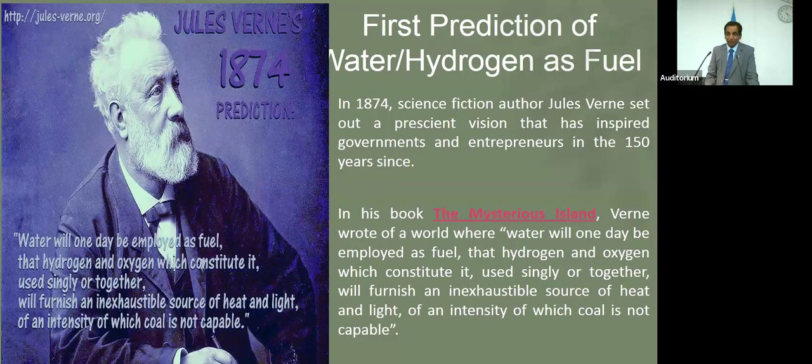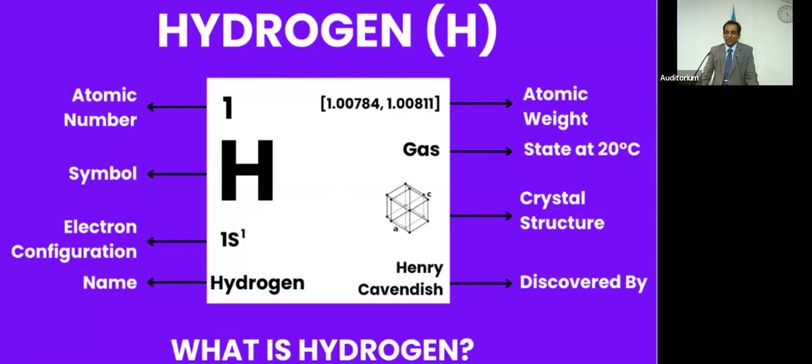So we will go into hydrogen. We all know hydrogen is the smallest atom and it's the starting element in our periodic table. It was discovered by Henry Cavendish, and the atomic mass, the crystal structure - everything is there. The main problem with hydrogen is the nature of the size of the atom. It's very difficult to contain - it's the smallest atom in the universe.

Being hydrogen, nobody will accept hydrogen as a fuel just like that - it needs to fulfill certain characteristics for the commercial world to accept it. So I have listed out some of the characteristics that are required for any energy source to be considered a suitable fuel. The first one is the energy content.

You can see there are many energy sources like geothermal, but the energy content you can harness is quite low because there's no exergy difference there. Then there's availability - take geothermal again, it is available only in a few places. But if a source is available around the globe, then it can be considered.

The third one is engineering sophistication. For example, take nuclear energy - how difficult it is to generate nuclear energy. So people would like to see the simplest technology for the conversion of energy from the fuel source.

And fourth is cost of production - it is the most vital factor, even though I listed it as number 4. Everybody will look at the cost, and the stage of development of energy conversion devices. You can have an energy source, but if you don't have conversion devices to utilize it, you can't do anything with it.

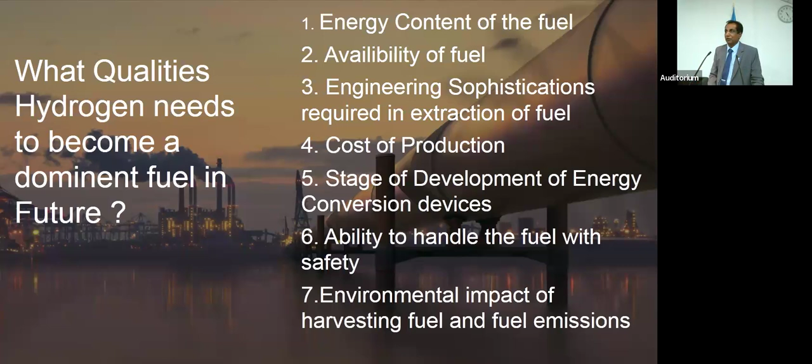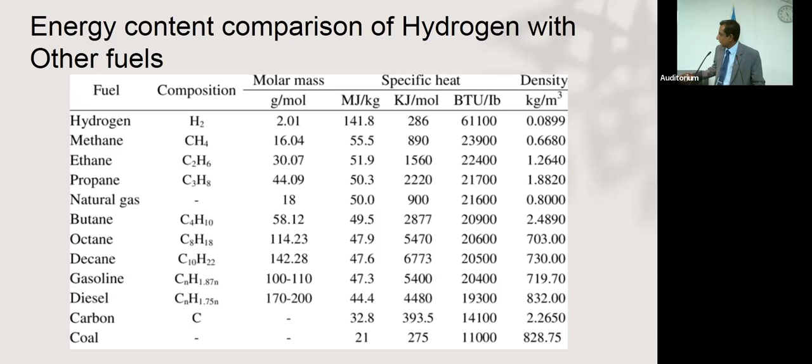So I will go through these one by one to show why hydrogen qualifies. You can see the hydrogen energy content is 141 megajoules per kilogram. We all know gasoline and diesel are about 47 - this is almost 3 times that of diesel or petrol. So it qualifies - it has almost 3 times the energy content of the fuels we use today. Hydrogen qualifies on that matter.

Then, availability of hydrogen - I will show you a little clip on that.

Sound is not coming.

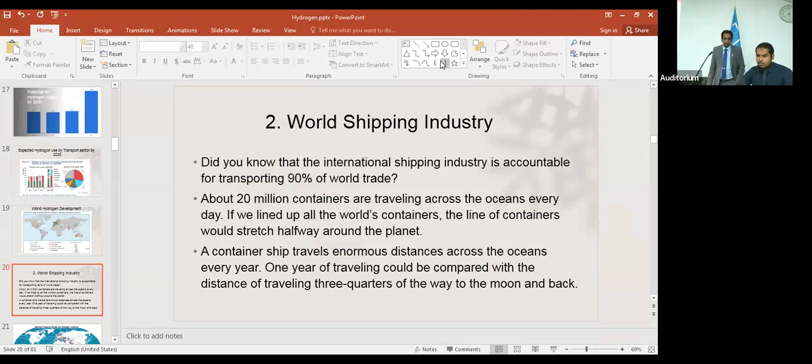So they can't see the slides. You can share again, it's not showing here. No, I'll call someone.

Right now, 90% of the world trade happens through shipping. Per day, 20 million containers travel across the ocean. If you line them up, it's half the size of the earth. Containers stretch halfway around the world. A container ship travels enormous distances across the ocean every year.

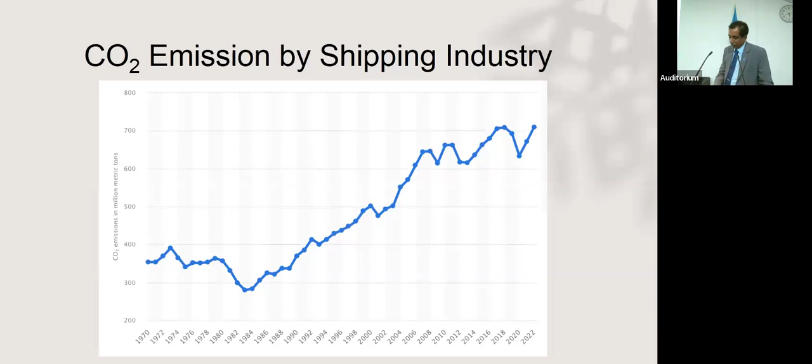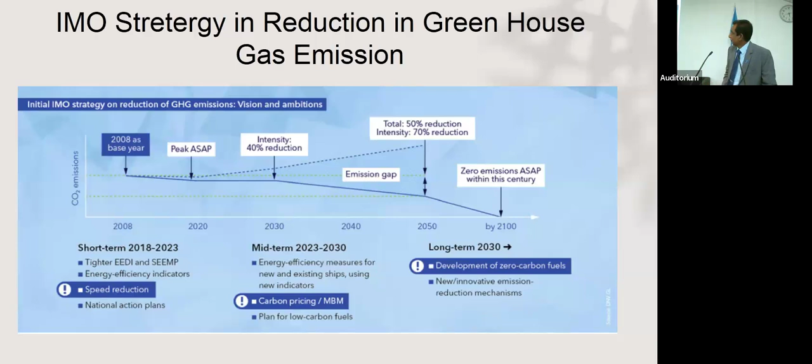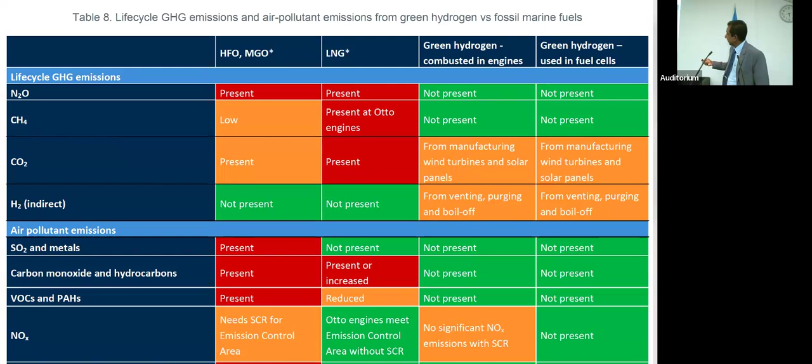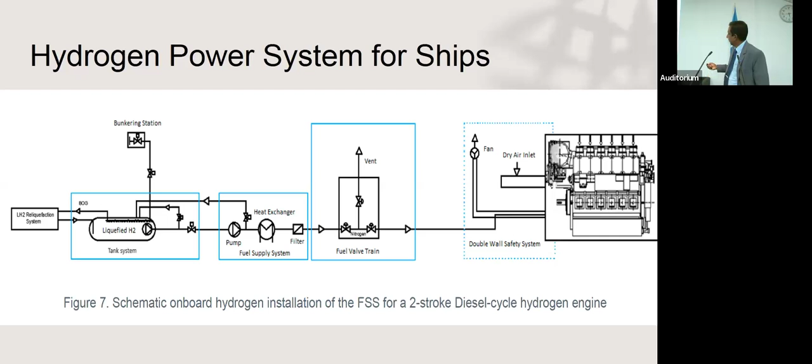But generally it would be very clean fuel. If we take the powertrain of a ship with hydrogen, you can see there's a liquid hydrogen storage tank and the fuel pump. This is a gasification process where the liquid hydrogen would gasify and then feed into the engine and go into power generation or the drive.

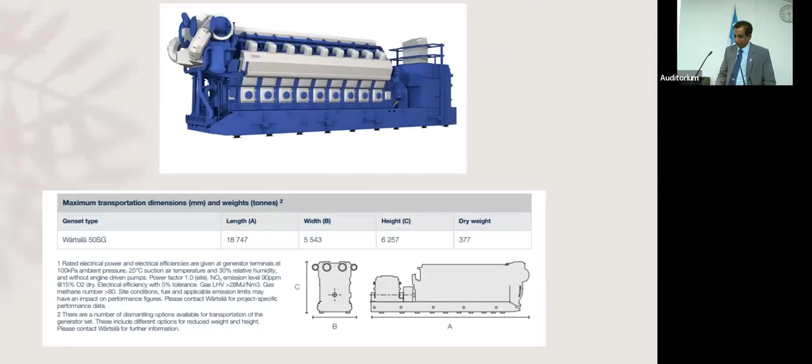This is Wärtsilä, one of the major shipping industry players, they built their hydrogen engine. You can see everything is already being finalized. This is the ship development for coming years.

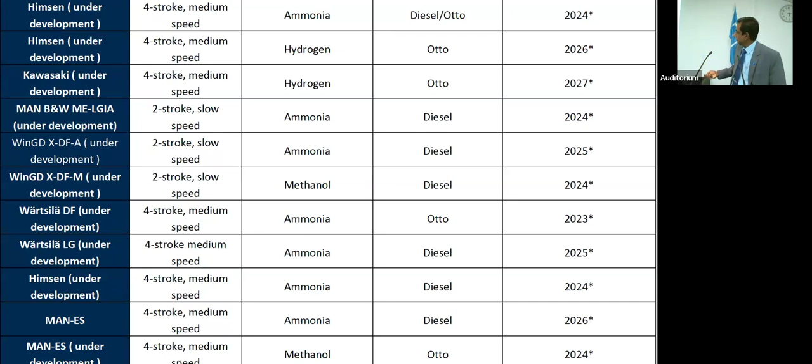First one, Himsen, 2024, it is from ammonia. Then 2026, 2027, there are two hydrogen models coming, Kawasaki and Himsen. So it will be coming onto the ships, you can see how it's being developed. Ammonia, hydrogen, methanol, so they are using all the fuels. These are the cycles of operation, the plan for the upcoming mechanical driven systems in the shipping industry.

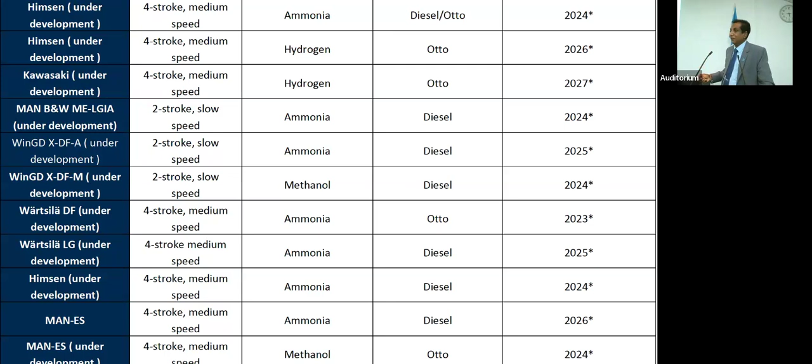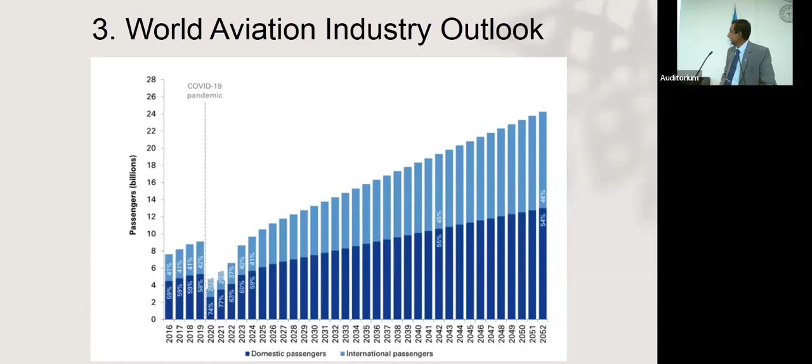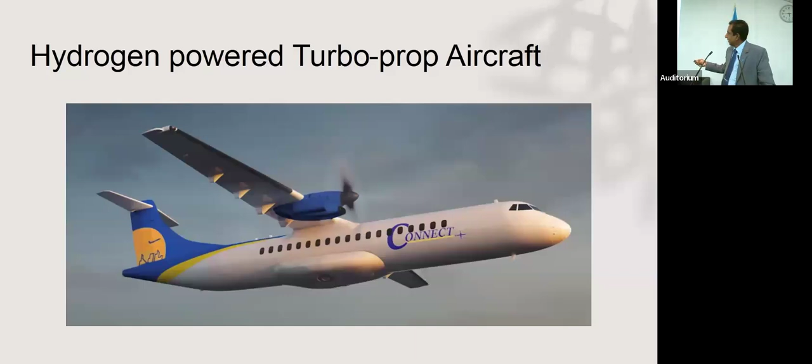Fortunately, right now they have started hydrogen powered turboprop engine testing, and Airbus has started their gas turbine testing. This is actually how it's fixed, so it is not sacrificing any safety. It's running with the main engine, this is being tested while the other engines are running.

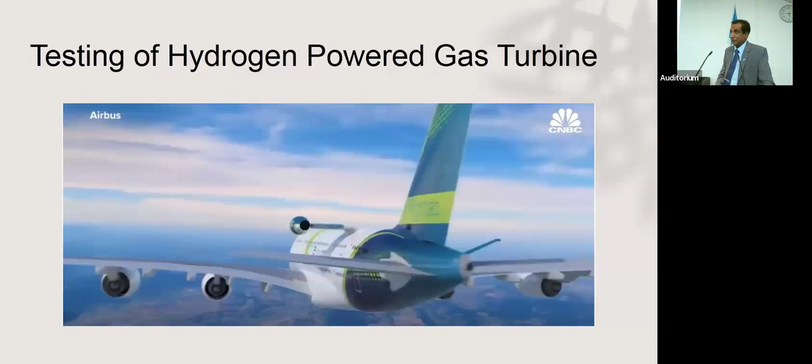As the hydrogen infrastructure is not built, they are developing pods, hydrogen pods, where you can just plug in. So you don't have to build your infrastructure, piping network or anything. It's like your luggage, it will fit onto the cargo chamber of the aircraft. You can just plug in this gas and run it.

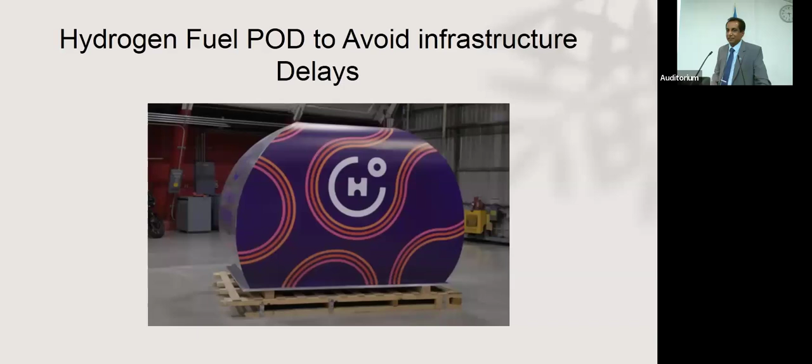As a country, we have to look on to something like that because we don't have the capital expenditure to put all the pipeline, but we can have our hydrogen system and make hydrogen pods of this nature, right? Where we can fit and give it to the ships. This is like a containerized thing, like our trade pods, where we can fill it and send it.

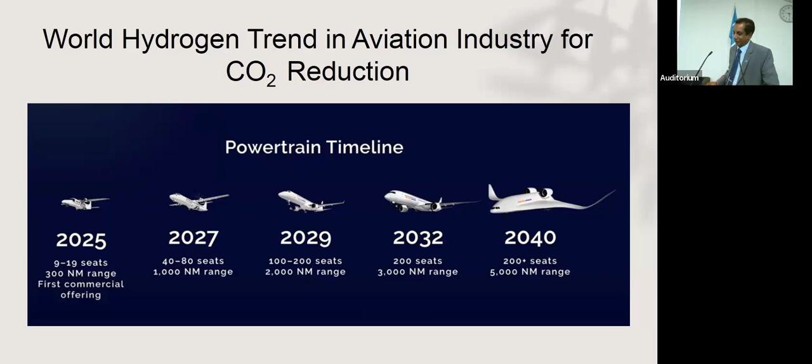So these are the aircraft development plans for the future in the world. We have to see how our fuel supply trend is matching with this one. Our Colombo port, our airport is not of that nature, because generally air travel will depend on business clients, and we don't have much industry where business travelers are coming. It's only tourists coming, but as per Sri Lankan Airlines, we serve this much of routes, so there are a number of aircrafts coming. So there will be some requirement of hydrogen.

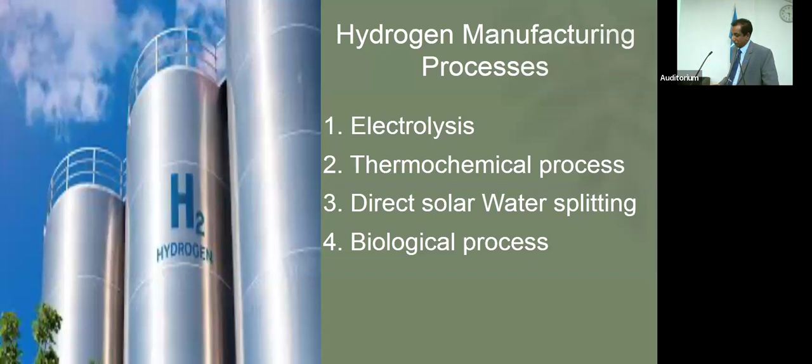So we had discussed the requirement of hydrogen in aviation and naval industry, so we have to see how we can make it. In the world, there are 4 main processes: one is electrolysis, then the thermochemical process, and the third one is direct solar water splitting and biological processes. So those are the main processes where we can use hydrogen manufacturing.

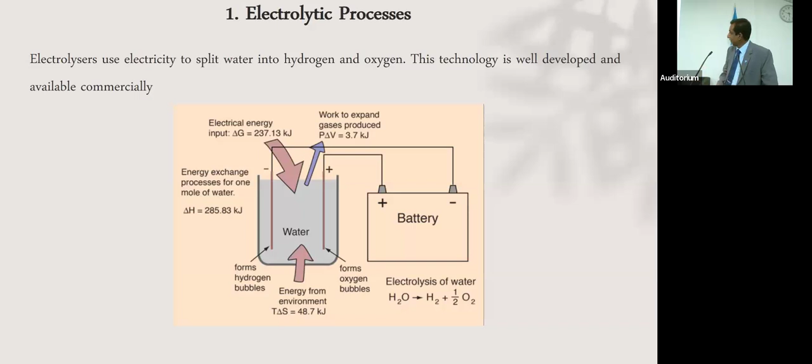So for electrolyzers, I initially showed you the simple thing, but you can see with the energy balance how it's coming. This is how it happens, but actually right now it is happening on this scale. It's called PEM, a polymer electrolyte membrane electrolysis. So this is the membrane.

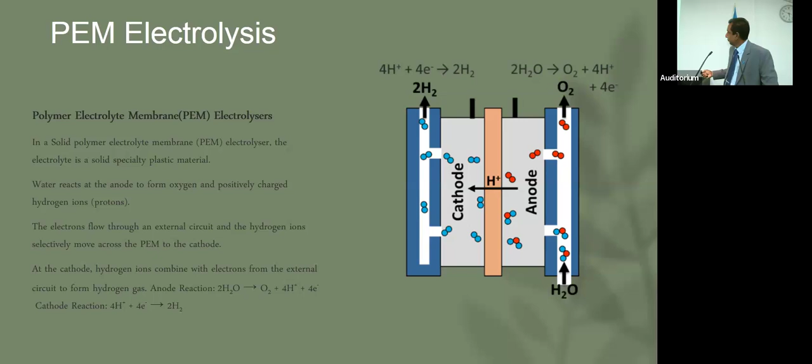So when we are making hydrogen, we were putting salt, right? You can't put salt when it comes to commercial operation, it will deposit on the electrodes. So that's why they are using this membrane. It's a polymer membrane that allows the proton to be moved, and I will show you a little video on that.

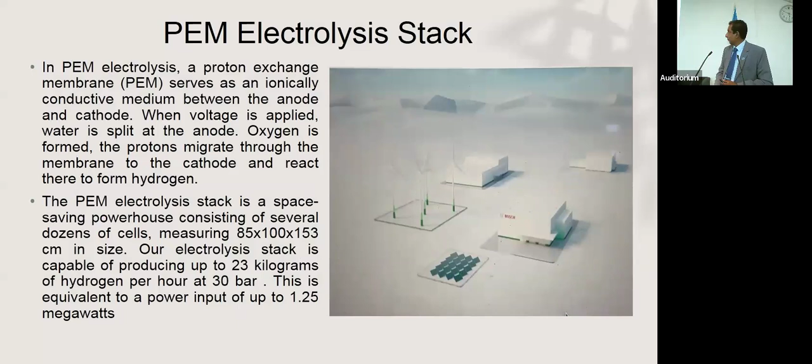You might be able to see, this is the Bosch PEM electrolysis system, but this is a commercial scale. I will show a more detailed one later. So this is called the hydrogen stack. They don't call it hydrogen, they call it the electrolysis unit, the stack. So I will go into more detail on this one.

You can see on this one how the system works. The containerized configuration reduces construction and installation costs because much of the process equipment is pre-integrated before arriving on site. PEM electrolyzers are a mature and proven technology, using only potable water and electricity as process inputs. NEL's PEM electrolyzer system design operates at full differential pressure, hydrogen over oxygen, essentially eliminating the hazard of oxygen entering the hydrogen stream. Water, purified by a reverse osmosis deionization unit, enters the cell stack and divides within the inlet manifold to feed each electrolysis cell. As DC current is applied to the bus connections, a small fraction of the water flowing through each cell is drawn to the cell anode and split into oxygen ions and protons. Oxygen gas bubbles then form at the anode and are forced into the bulk flow stream. The water and oxygen management system circulates water through the cell stack to be consumed via electrolysis, removes heat from the cell stack to maintain the proper temperature, and removes the oxygen gas generated in each of the cells. Simultaneously, hydrogen is transported from the cathode side of the cell to the hydrogen management system. There, the hydrogen phase separator separates the liquid protonic water from the hydrogen gas. The hydrogen gas leaves the separator and is cooled to condense water vapor from the hydrogen gas stream. The separated water is then transported to the water management system and is reclaimed into the water circulation loop.

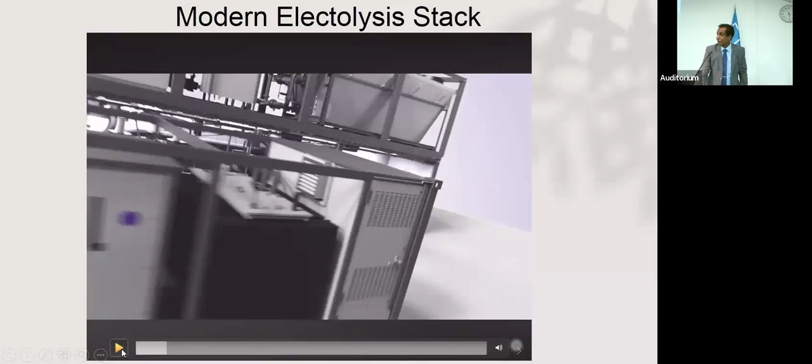In steam reformer technology, you react the CH4 methane with H2O steam. These H2 will contact with this, so 3 hydrogen molecules are created and carbon monoxide. Carbon monoxide is a very unstable element, so it always tries to become carbon dioxide, which is its natural form. So when the water is present, it will grab the oxygen and become carbon dioxide, and make another hydrogen.

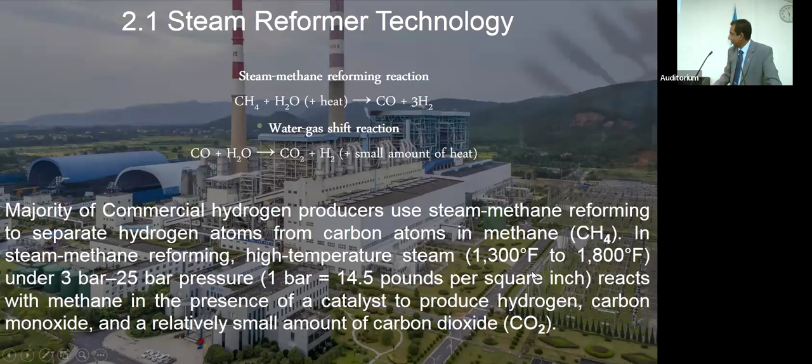So steam reformer technology is the technology that generates the highest density of hydrogen in any process. When you take electrolysis, you get 1 hydrogen and half oxygen, but here you get 4 hydrogen, carbon dioxide - that is the advantage of this one, you can get very high density of hydrogen. There you have to see the temperatures - the temperature of 1300 Fahrenheit, so they are operating at very high temperatures to achieve that.

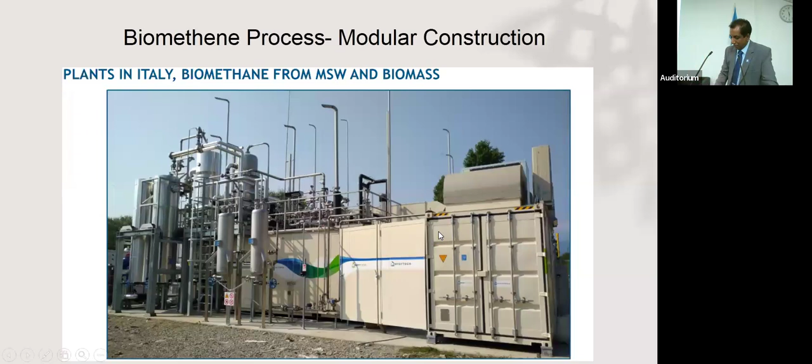I want Sri Lanka to try this kind of thing. We don't want a very big plant - we have to have maybe modular technology. Try this one, we will see with our garbage, our municipal solid waste. This is basically from MSW, municipal solid waste. So we can collect our municipal solid waste and process it, generate methane, and then that methane can be fed into this and generate our requirement of hydrogen. So as a country, we should start with a small step.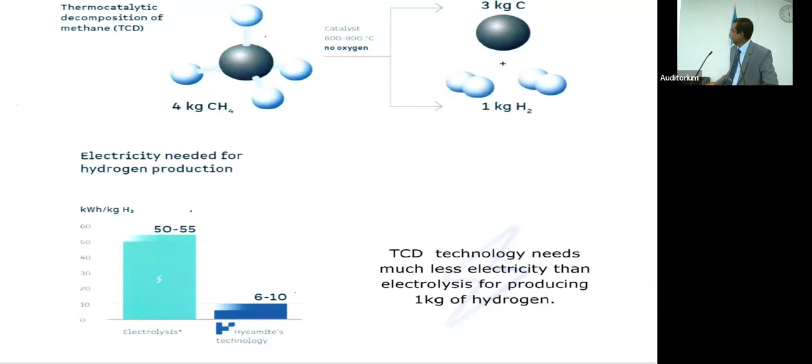And also the carbon dioxide emission - you can see for 1 kg of hydrogen, you have 3 kg of carbon. When you have the catalytic process, you can reduce this steam reformer's 9 kg again, you can reduce it.

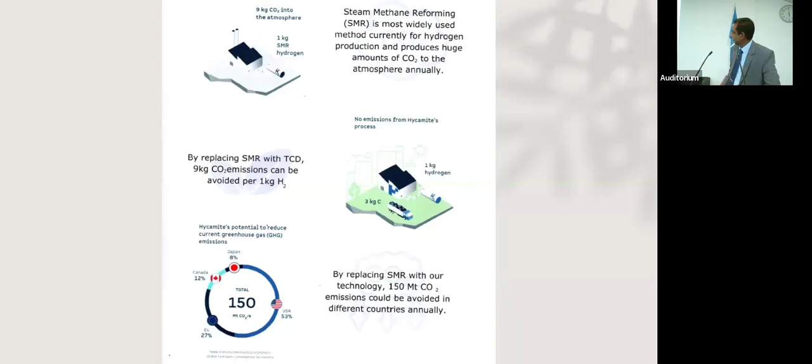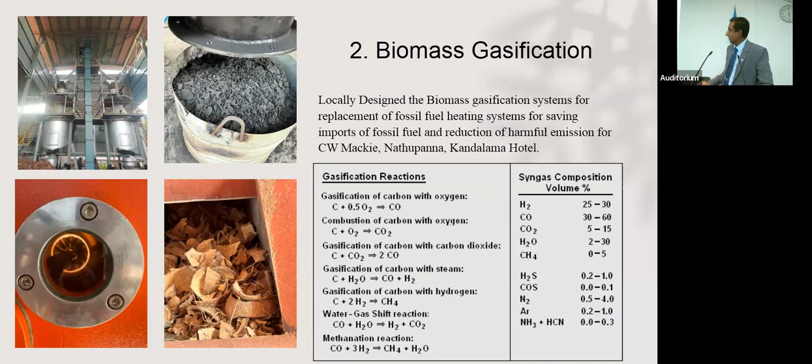So you don't have to go for very high technology. This is actually my design operating in Sri Lanka - this is a hydrogen plant. The biggest advantage is that you have a carbon sink there - 40% carbon is stored there. So I will show it to you.

This is the first experimental unit I had done with a few of our engineers. You could check the color of the flame here - you will see it coming white. This white area is the hydrogen part. You can see this is a local design process where the biomass is converted, and with hydrogen you can see this white color. I'm sorry about the noise, it was recording sound.

So you can see it's a continuous gas coming out, right?

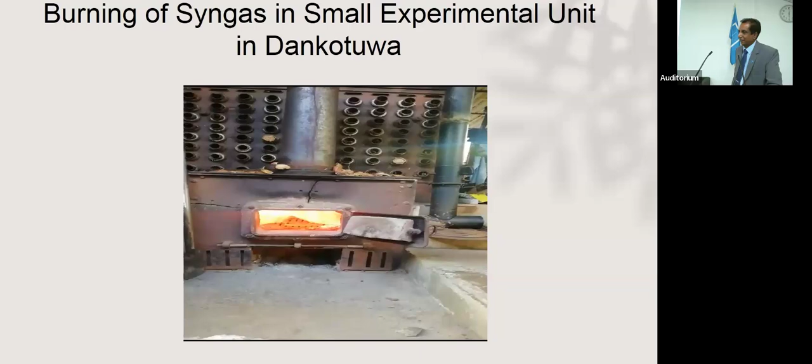When you have the correct oxygen level, this flame cannot be seen. This is without much oxygen mixing - this is actual level. You can see the smoke coming, but you don't see the flame there. That's the biggest danger with hydrogen, where you have an invisible flame - you never know until you catch fire. When your clothes or anything burns, you can see because it becomes yellow, but hydrogen, when it's burning, is an invisible flame.

This is today morning's operation - you can see it's very less color. So that system is generating hydrogen and carbon monoxide, it's burning there. Anyway, Parakrama had done this about 40 years before me, but I'm telling you, this is another technology we can do in our country to generate hydrogen.

Generally these kinds of plants have been there from commercial scale, I think from 2000. Kandalama Hotel is having one gasifier, CW Mackie Horan is having one gasifier, Tea Factory Hotel - in all of this I had involvement and we are doing it. Right now I'm trying to see whether I could give the technology for some industries to convert from fossil fuel to this type of our own fuel sources.

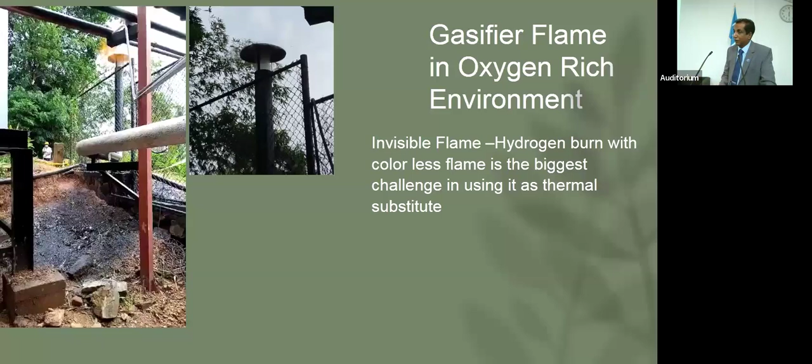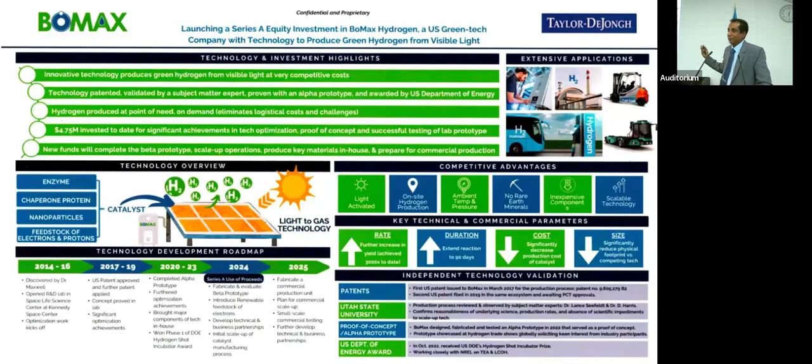So you can see how many techniques are available to generate hydrogen. We were looking at only electrolysis. I hope I brought you something you have not seen, where we can go into different areas of generating hydrogen.

Potential sources for Sri Lanka, I would say steam reformer using municipal solid waste we can do, and even electrolysis - not to a very big scale, but we can start on that, then gasification. Those three techniques we can see. I am not talking about the enzyme type because it is still in the experimental phase, but it will be commercialized pretty soon.

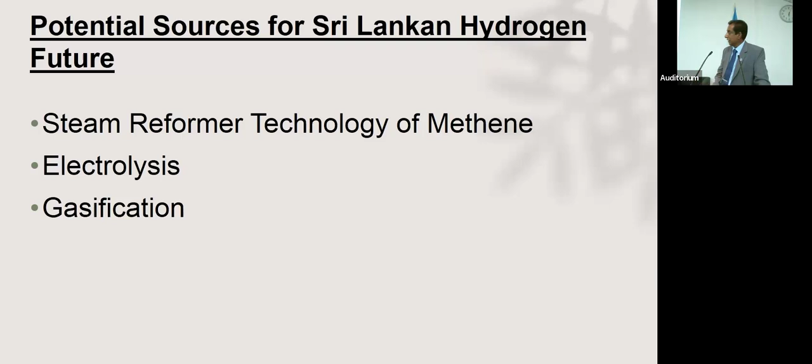So with the other sources, we would be able to increase it to 10 metric tons, right? Because this is Western province only. If we take all the provinces, we can go into 10 metric tons, right? So we can start those things. So I will show you, right?

This is the municipal solid waste, and this is how much methane is generated. Right now Sri Lanka is producing about 7,000 metric tons of municipal solid waste every day. Out of that, 50% is biodegradable. So 7,000 means 3,500 — we have this much. You can see how much methane we can generate, right?

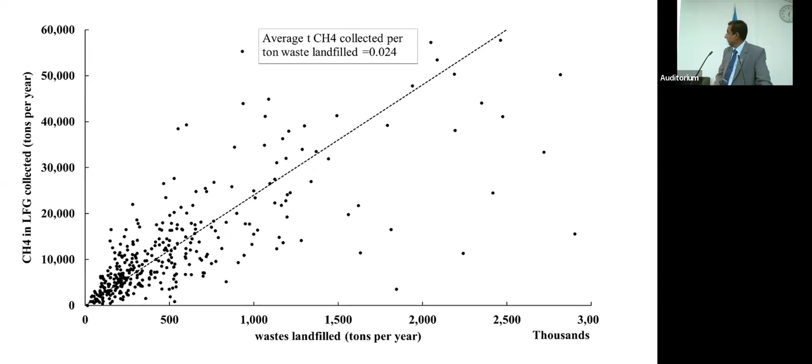So if we use our biodegradable municipal solid waste, we can generate more and more hydrogen into the system. You can see how much kilograms of methane can be generated. This is for anybody who would like to research into this area. All the information I've given, and I'm more than happy to support anybody who wants more information. So the conversion process of methane to hydrogen — you can see how much water is required, the energy, and the natural gas, so you could get 1 kg of hydrogen from that.

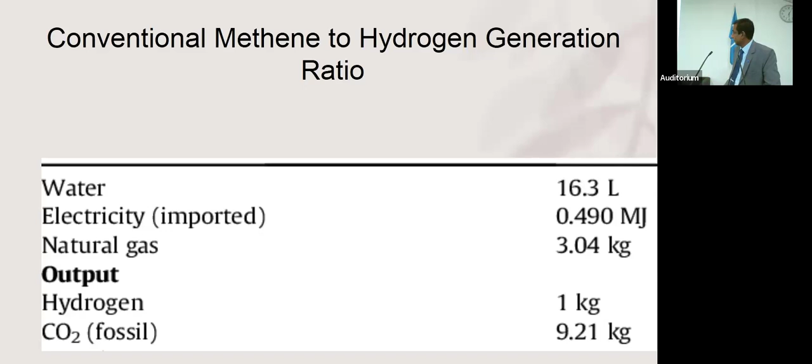And future hydrogen storage terminals would look like this. You can see, in airports, right? In ports also, when we have our hydrogen, we should have hydrogen storage hubs like this, right?

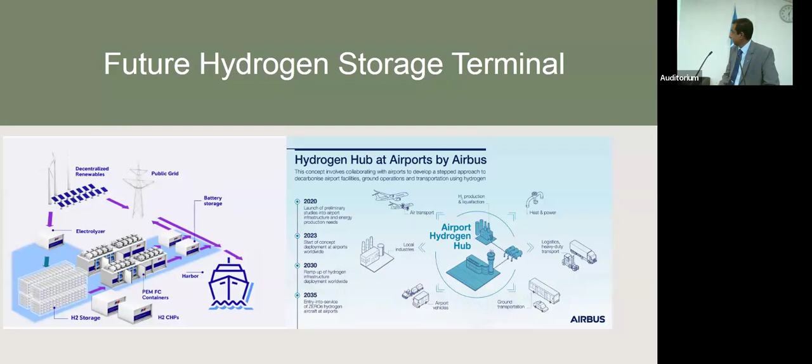So we talked about the good story, the best side of hydrogen. But there are many challenges as engineers we have to take on with hydrogen. So I would like to touch on those areas also.

First thing is for electrolysis, the water quality requirement — you have to see, right? This is lab scale water. You can see the chlorine level, the sodium, the silica, right? You can see how much purity of water we require in this electrolysis. Because if not, they will deposit on the electrodes, right? So this is the most challenging part. It's very easy to talk about the fairy tale of generating hydrogen, but generating this water is more difficult than making hydrogen, right? So you have to focus on that part.

That's why I wanted to highlight this one. So it is not easy — you can't just take an RO system, reverse osmosis system, and generate water, right? There is polishing and many other things to be done. You can see the requirement. So it is the most challenging thing we have to do with electrolyzers. We have to remove iron, particles, organics, bacteria, because everything will deposit and your performance will go down in no time.

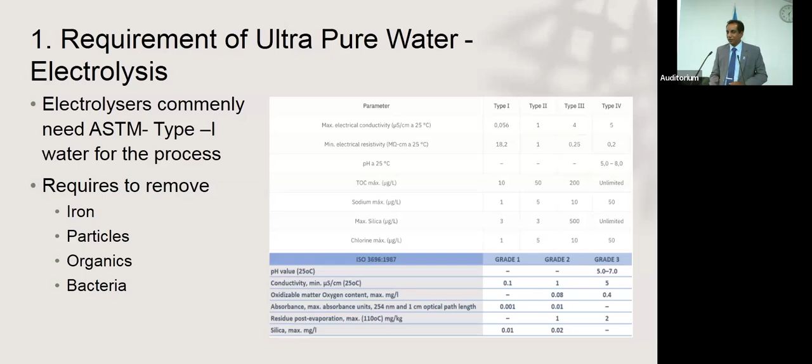Second thing is hydrogen storage temperature. Hydrogen has to be stored at minus 253 degrees — hydrogen will be liquefied at this temperature. This is almost absolute zero. 273 is absolute zero, so we are almost close to absolute zero. Keeping hydrogen at this temperature without heat being dissipated out would again be a challenge. This is called cryogenic, right?

The word cryogenic actually came from history — imagine the pharaohs in Egypt. If they were sick, they wanted to keep the person frozen until a medicine was found. That's why the word cryogenic came — that temperature was used to hibernate people. So these are the cryogenic temperatures we have to use, and keeping that temperature in the system would be very difficult.

Hydrogen evaporates at minus 252. So if the temperature increases, liquid hydrogen will become gaseous and create more pressure in the system — that is a very, very difficult task. Helium is the most challenging, but hydrogen would be third on the list. That is a very, very difficult thing.

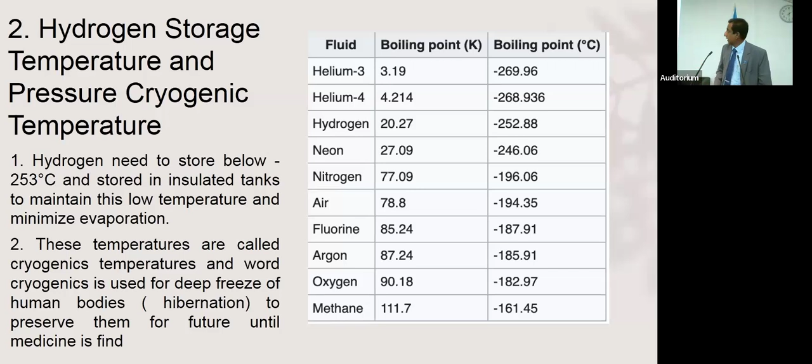And another one is hydrogen leakage. This is called the Hindenburg disaster, May 6, 1937. Hydrogen had been used before for air travel, for air balloons. There was a small leak, and in no time it burned — all the crew, 61 crew and 36 passengers, died on the spot. They were burned in the sky. This is the danger we are talking about — hydrogen leakage would be very, very lethal and a very difficult thing.

But as I told you, storage has been built with carbon fiber where even a sniper bullet cannot penetrate.

So there are many things that come, but still as a Sri Lankan, if we are building, we have a lot of challenges to do, right? So that's a very, very difficult part.

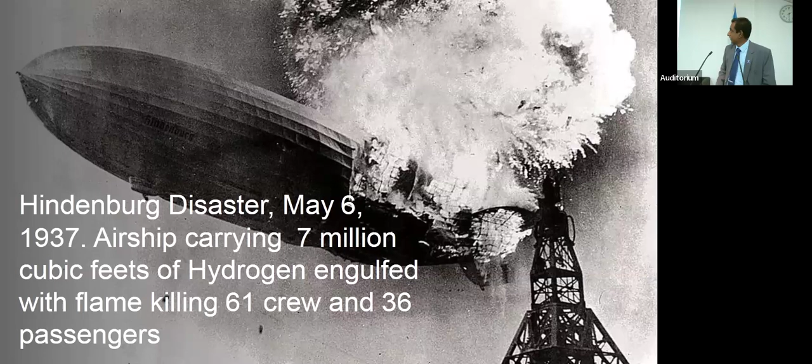Then the compressors. Actually, these compressors are already developed because LNG, liquid natural gas compressors are available in the world. For hydrogen, it needs to be stored at a pressure of 350 to 700 bars. So you can imagine, we never talk about 120, 160 for boilers, right? Here we're talking about a 700 bar pressure system. It is unbelievable pressures we have to work with, on liquid phase. Reciprocating and centrifugal, we can reach those areas, so easily the technology is available.

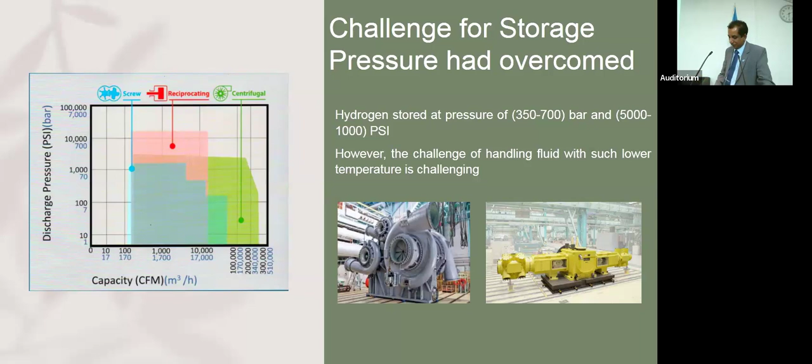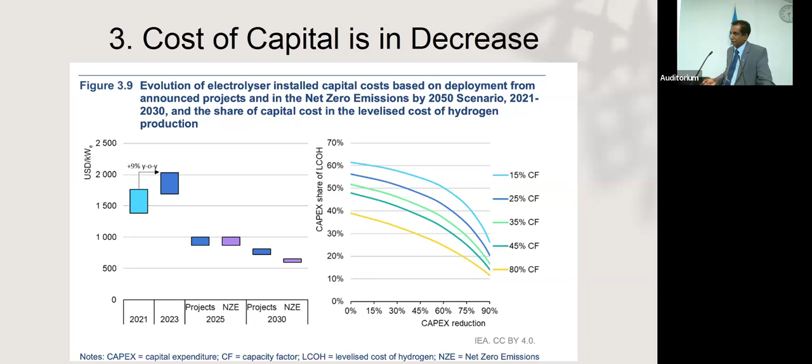But I will tell you there are challenges with it. The capital cost right now for 1 kilowatt is in the range of 1,500, but we expect it to come down to 500. So these are the trends. Until the trend comes to that point, it would be unaffordable for countries like us. But we have to see that part separately.

And the other one is storage space, because for a ship or aircraft, the space is very precious for them, for passengers and cargo. You can see marine grade oil, if it requires 1, hydrogen requires more than 4.5 volume. So if it's 1,000 meter cube, they require 4,500 meter cube space. That is a challenging part, especially on ships. This is very, very difficult.

That's why I told you why we require hydrogen infrastructure. No ship will carry fuel from one port to the end port. They will require refueling at a mid port, because they can't carry all the fuel since it requires a lot of space on the ship. If they keep that much fuel, they can't carry the goods. So they'd be sitting on a very dangerous bomb. They will always go for minimum volume, which makes their cargoes economical. So that's why we require this, and this is again a challenge.

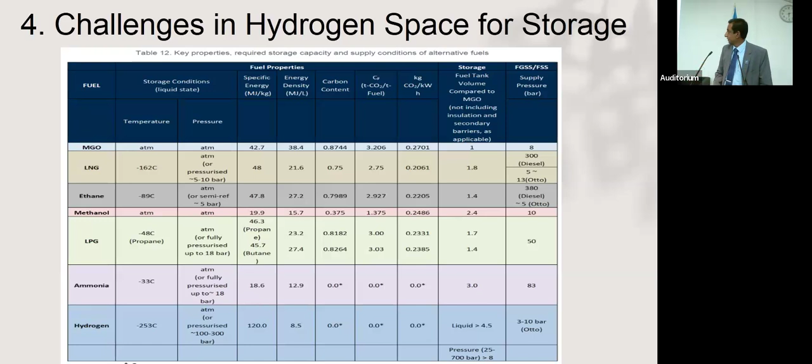Even at 700 bar at minus 253, we have this issue. So you can see the challenges we are facing in the usage of hydrogen as a fuel. So this is the fuel pump that I told you about. The fuel pump is the greatest challenge in this hydrogen industry.

If I tell you why: if it's a car, when your fuel pump is maybe at 30 degrees Celsius and minus 253 comes, all your seals will not hold up. At that temperature everything will shrink, so you will not be able to maintain it. That is the most challenging part in the hydrogen industry, how you maintain such a temperature difference. Once it starts pumping, you get a super cool liquid going through your system, but when it's not running, you're at atmospheric temperature. So it's a very, very challenging thing.

So they have different technologies like pre-cooling systems to get the system staged, just like the boilers. We never pressurize to the full pressure initially, we do it in stages. So there are many systems being developed for that. This is one of the greater challenges we have with hydrogen.

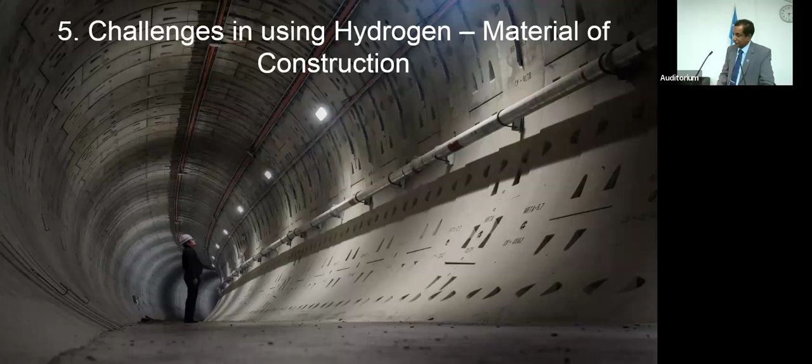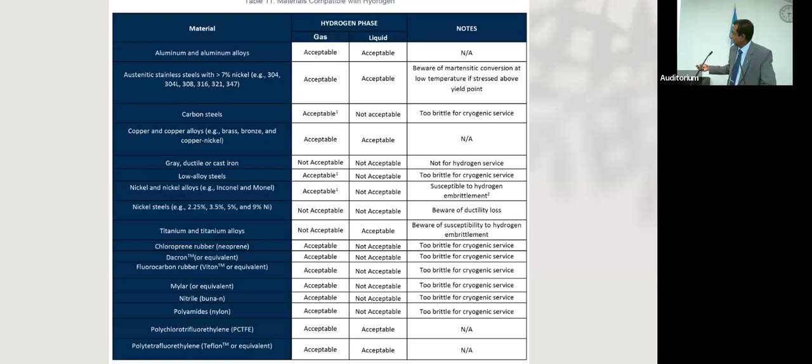You know, all the mechanical engineers know about hydrogen embrittlement in welding, and how it can create so much strength failure and problems. So the material challenge is the next major challenge we have. That's why people have gone for reinforced carbon fiber, so that technology is developing. We hope we will be able to see good material coming on this.

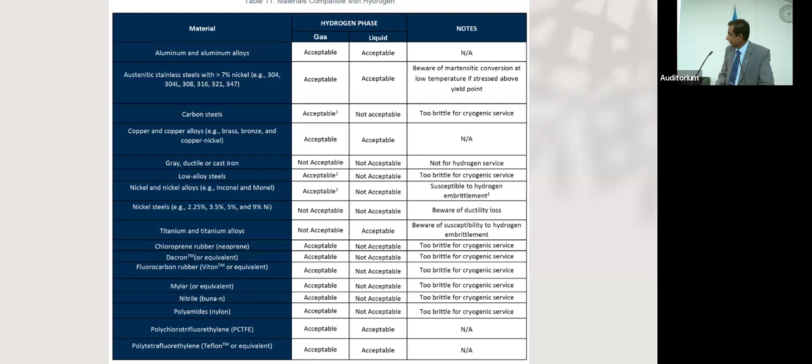And other challenges would be large scale production. As I told you, there can be a lot of risk associated with it: technology and infrastructure limitations, safety considerations, supply and demand uncertainties, lack of policy incentives from government. So you can see these are the other challenges we have to consider.

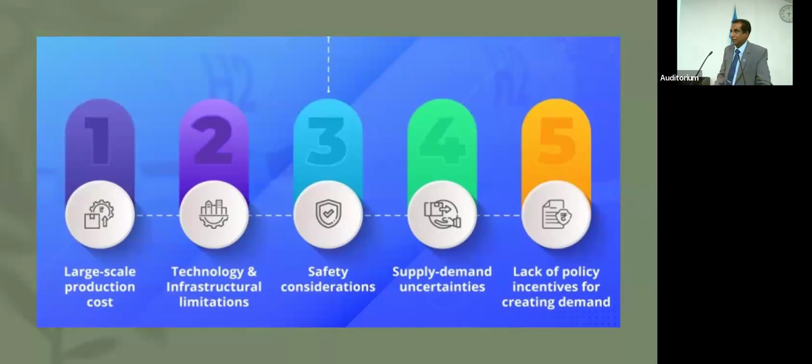Despite many challenges, hydrogen is still picking up because it has so much financial and environmental value. So as a country, even though it is challenging, we don't have to go for high pressures. Let's use it at atmosphere level, or at a certain manageable level.

So you can see this is 5 university students from the USA. They had developed a hydrogen bike. I wanted to put them here to appreciate their effort, because while the whole world is doing research, these kinds of students are also there trying to touch on this area.

So there's a canister, you might see here, it's like a canister type. You have to plug in the canister, and it can go up to 70 miles. After that, they have to change the canister and go. It's like having your own LPG cylinder, just plugging it in and moving. So they developed this running through fuel cell technology, generating electricity to operate it.

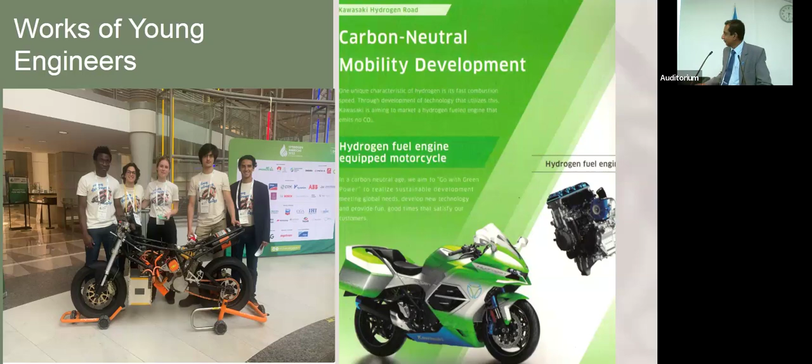So it's a Kawasaki bike, and they had already gone into this. These are all gaseous, you have to see this is not liquid hydrogen storage, because we will have problems if we have pumps there. So we can't have pumps, it will be running on gaseous hydrogen.

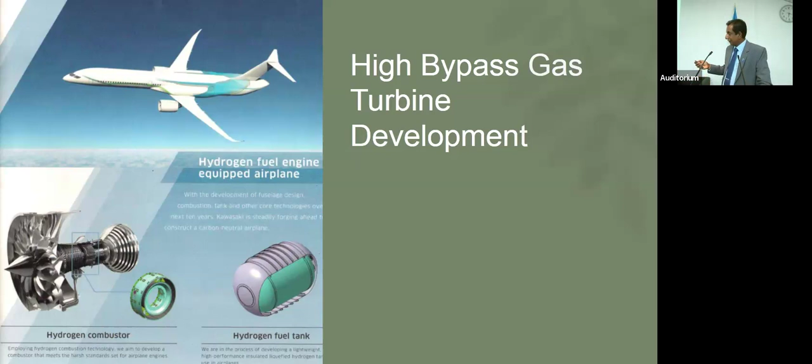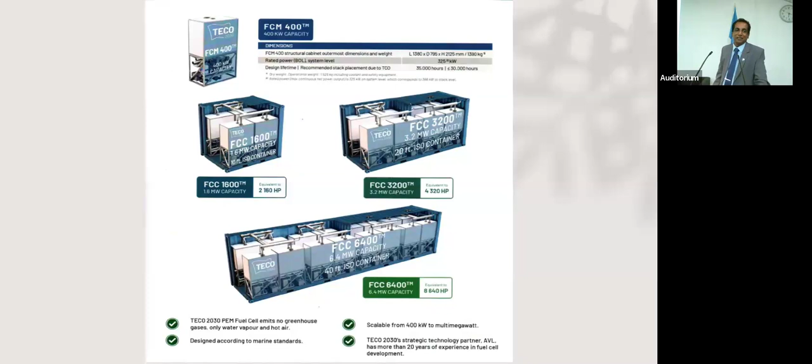Despite the challenges, they are making every effort to make hydrogen more feasible. You can see now you can buy a containerized fuel cell unit like this, 6.4 megawatt capacity, or a 3.2 megawatt capacity version. It's available in the market where you can buy this, so if you have the hydrogen, you can get this unit, run it, and get the power requirement you need.

So what does Sri Lanka need to get hydrogen ready by 2030? First is a policy directive to authorize construction. Even with certain hydrogen projects in Sri Lanka, we find it very difficult to get policy decisions aligned with this requirement, because I feel we should not go into a very big project, but should start with something to get to know the technology.

For example, the Dendro biomass plant started with Walapane. Even though everybody blamed Walapane, that was the learning point where we learned everything about biomass. Then we were able to operate, and now you can see all the industries running on biomass boilers. So we require something to move ahead, we require policy directives to be aligned with the hydrogen future.

So you can see the cooperation between governments is needed, but unfortunately Sri Lanka is not there. The company I'm working with, an Italian company, is ready to come, but we are still trying to get the policy directive aligned to get into this, where we can have some sort of agreement and move forward.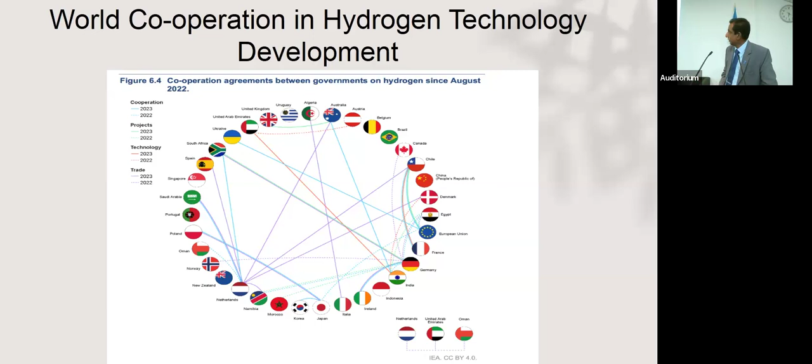The next requirement is to get cooperation between the other government and get something going ahead. Another issue is we cry for bigger plants, but let's start with smaller containerized units, and see maybe from Pradeshiya Sabha to Pradeshiya Sabha, or district to district, let's start some centers.

Let's give some energy, let's generate, first we can generate methane and sell it to the people. We don't have to make hydrogen right away. Methane is a good fuel that we can sell anywhere. Methane is nothing but LNG when it's not liquefied, LNG is when it is liquefied, but even LPG we use at home is in a gaseous phase.

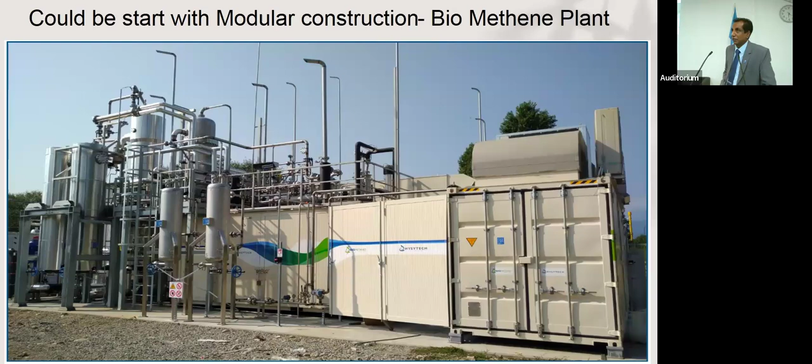Liquid gas will be vaporized and used, but we can have our system going, generating methane as a modular construction as a starting point. Then when we have the generation points going, we can have the second module coming in, plugging it in. For example, even for Colombo, we can put some container and give it to the recently planned LNG power plant, because the LNG is gasified before it is used, so they can easily use this. We have to see how we can get this going.

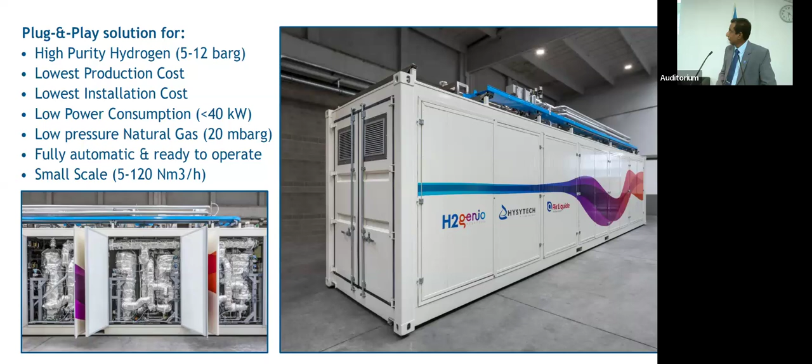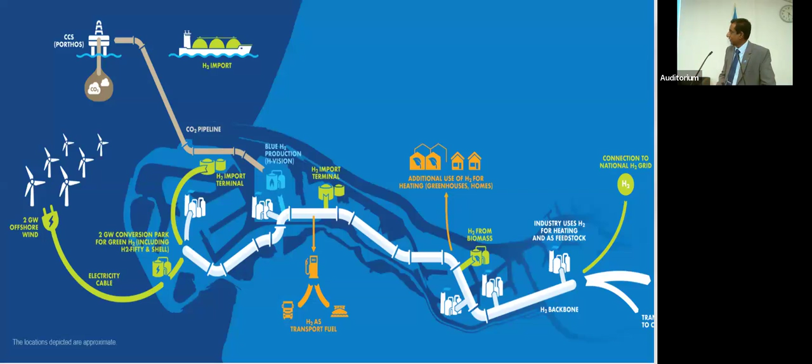This is on the Netherlands, how they had planned their port infrastructure. You can see the pipe network, everything. They are getting power from wind turbines and things like that. We might not be able to have all these things, but we should have at least some hydrogen storage tank in the port, and we should be able to refuel our ships. That infrastructure has to be built to meet the challenges of future vessels coming into Sri Lankan ports.

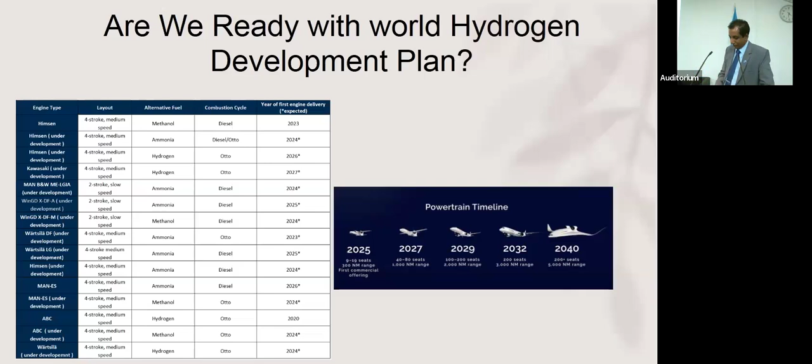I told you initially, you can see the engine development. There is technological development coming in 2025, 2020, and aircraft development up to 2040. We have to have our plan aligned with these. It is not that we don't have our plan, because I will show you our plan, the Sri Lankan plan.

So we are planning to have one by around 2035, this range, you can see. These are the policy directives, but I haven't seen it coming yet. This is the Sri Lankan hydrogen plan, so we need to expedite these things and get going.

So how realistic and how updated these things are, we have to check and see as a country how we can get into the market, because with hydrogen we will be able to reduce at least 1% of fossil fuel use. That would generate a certain amount, meaning a lot of foreign exchange savings.

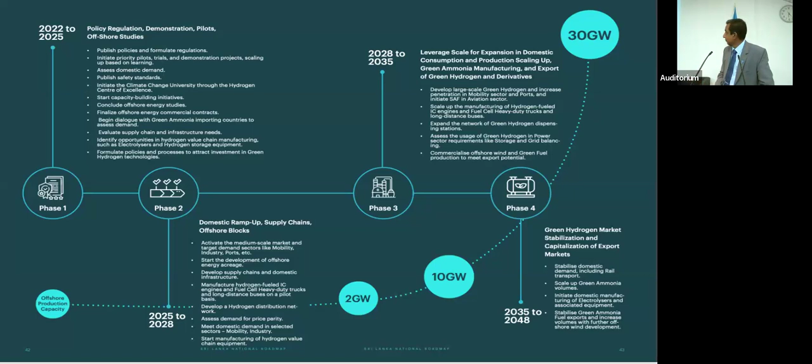There was a comprehensive and informative lecture on the manufacturing process, the challenges, the demand and feasibility within the aviation, transport, and marine sectors of the most abundant element in the universe, done by engineer Ruan Nagawata. Thank you, sir, for the time and energy you put into the presentation here today.